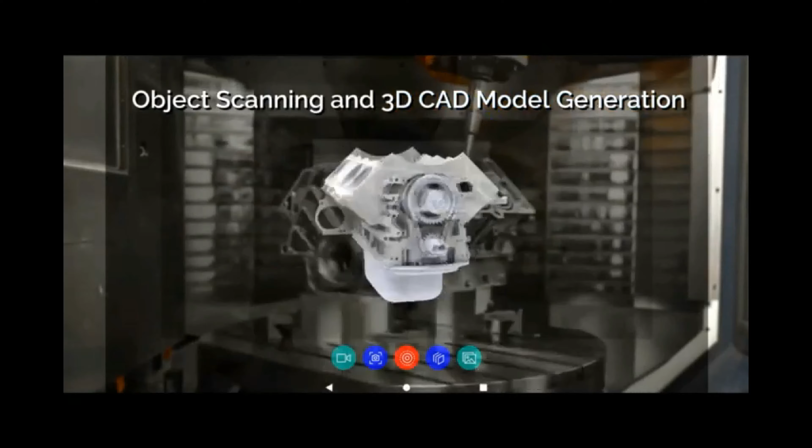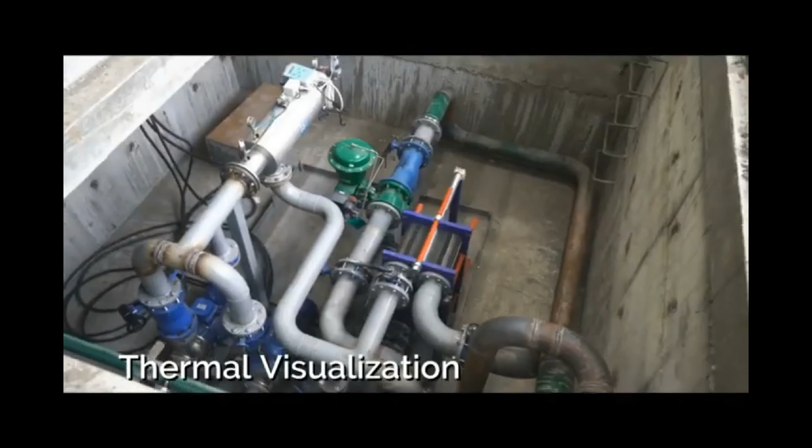Augmented reality wearable technology is transforming the construction and engineering industry by creating connected workforces, improving design processes, and introducing more efficient maintenance and repairs. From initial design concepts to completed projects, ThirdEye's X2 MR glasses are helping the construction and engineering industry face greater project demands in an increasingly diverse environment. Experience functionalities on the X2 MR platform, including remote expert assistance, object scanning and 3D CAD model generation, 3D CAD model overlay, and thermal visualization.

X2 MR glasses in the field: the Department of Citywide Administrative Services of New York City had a recent X2 deployment. New York City's GSA conducted a detailed virtual walkthrough inspection of a project site for a team of employees spread throughout the region with the X2s and Remote Eye platform, realizing 40% savings in task time for basic construction tasks. The remote team shared their voices and vision on the project's progress through the X2 interface, including video screenshots and live digital feed annotations.

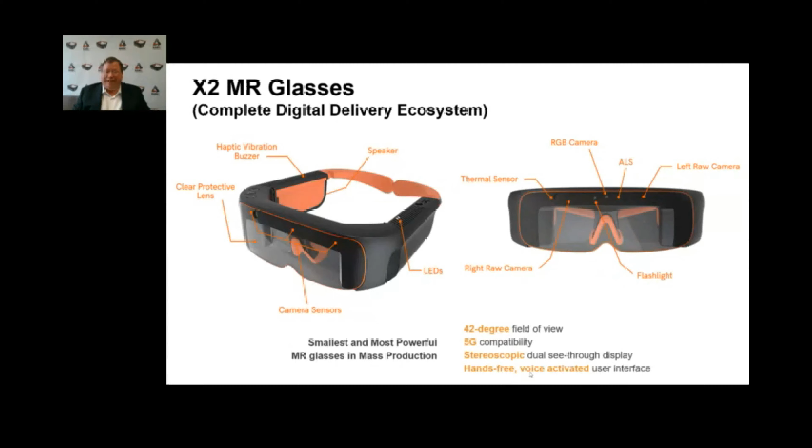ThirdEye's X2 glasses increase the capability and capacity of field crews and professionals working concurrently on a project across offices. Onboarding and training are always a top priority in the AEC industry. Consistency and quality of training can be vastly improved through this wearable technology. Onboarding and training of staff in several locations can be performed simultaneously by a single presenter, even in the field. The benefit of reducing travel time and cost is easily achieved through minimizing travel to meetings and site locations. Kind of look at it as Zoom on the move, really.

It's connectivity with freedom. By utilizing the AR/MR glasses, along with the customized MR Workspace suite of applications, projects will proceed much smoother through improved collaboration and workflow, and hands-free video and document sharing.

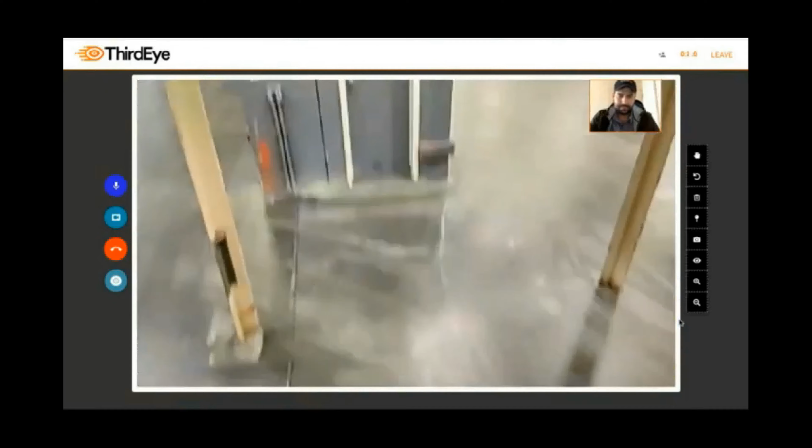Good, good. So let me just give you a walkthrough of the progress of work, so you can see for yourself. The conveyor belt demolition project is pretty much coming to a close, and the contractor is almost finished with the epoxy flooring that you see down here, as well as the cutout joints.

Got it. Let me just walk around a bit so you can take a look at the space. This is great to hear, by the way. Good, good. The space looks so different and spacious from when the conveyor was in place.

We'll be looking to repurpose the space soon. We have a few ideas in mind, but we have a few concerns regarding the electrical capacity of the space, particularly if we break it out. Okay, so let's take a look. I'll walk to the electrical panel.

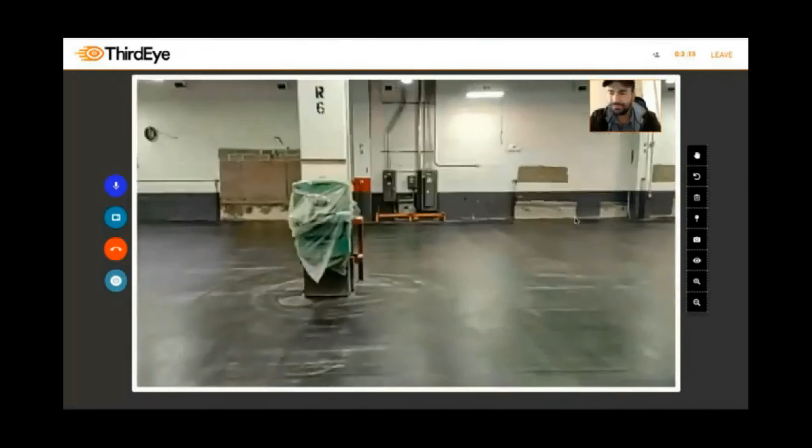Okay, here we are. So I'll pull up the images of the interiors of the breakers, so we'll switch that so you can see it. I'm just going to zoom in on my side here, so I'll pull up the images here.

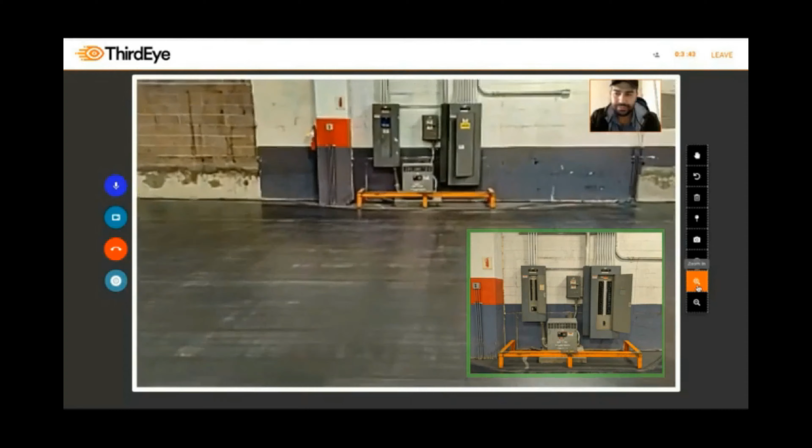They do look like they're fully utilized, right? Yeah, they do look like they're fully utilized. But when the space is to be repurposed, we'll need to likely add another breaker. It appears that we can add one next to the larger breaker that's on the right side, right here. So I'm just going to freeze for a minute in order to circle it.

So right next to the larger breaker, we're going to add, I'll be able to add a still image here right next to it so you can see what it looks like, okay? Okay, that'd be great, yeah.

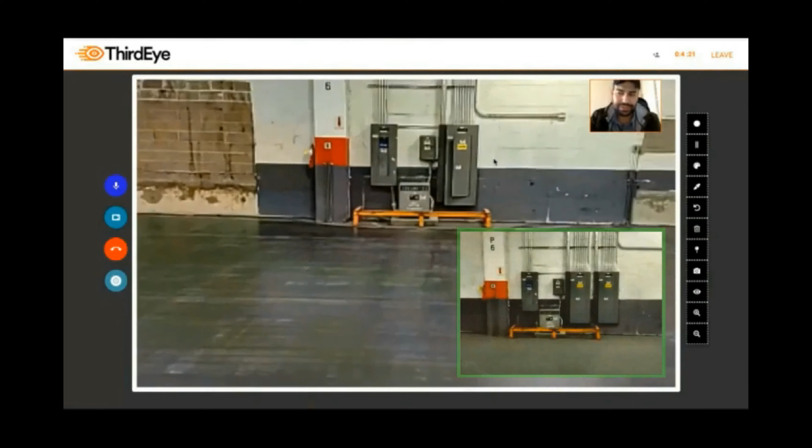And then we can show what it would look like for you so you know what it looks like for that secondary breaker. Sure. What it does appear, there is a good amount of space for a new breaker there, but I appreciate you showing me the space. Yeah, we can make further decisions as we move forward with the repurposing for sure.

For sure, so we'll do that. Okay, thank you so much, Louis. All right, I will talk to you later on. All right, take care.

So not only could the field inspector see the options and expansion of the electrical breaker in the future, we'll be able to return to the space after the repurposing has been designed and virtually see the new space in 3D. It significantly enhances the ability to understand and accomplish the vision and goals of the new space. In fact, after experiencing the technology, the General Services Administration is considering AR technology as a requirement on some of their future contracts. The X2 glasses are ready for use out of the box with an easy setup and implementation.

They're easy to operate by staff after an initial training session. ThirdEye understands fully that each client is unique. They meet with each new client to determine their needs and then work with them to develop applications specific to those needs, whether the need is training, mentoring, design, production, or maintenance. They develop the optimal pilot and onboarding program for each client so they can start with the team size they feel comfortable with and then ramp up throughout an organization. The customer service staff are available 24/7 to provide solutions at any time of day around the world.